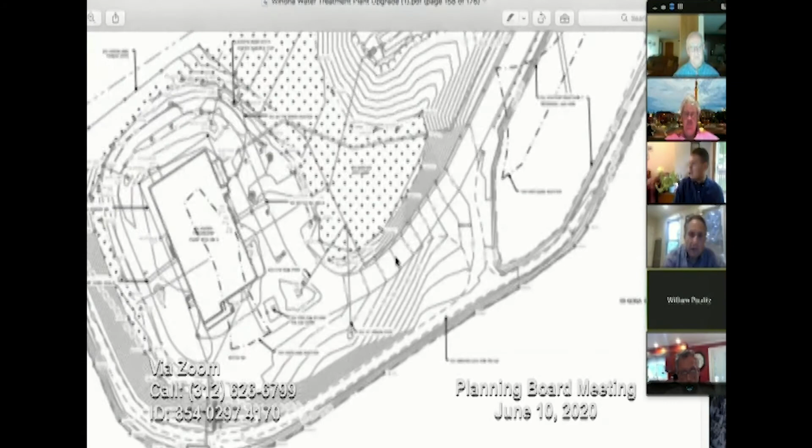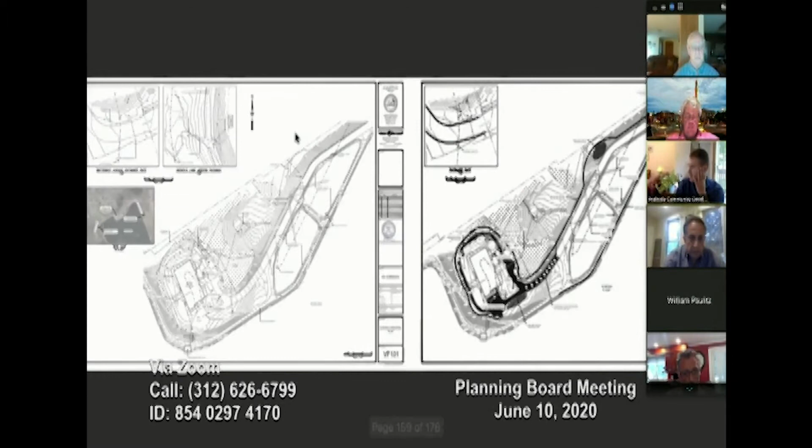Drew, if you want to go to sheet, I think it's going to be 168. If not, it's 159. Yeah, I'm gonna scroll all the way down. We'll see what happens here. So we need to expand out the back end of it by approximately 1,000 square feet. Yeah, that gives you a sense of where it lies in the property there. Or if you want to go to the renderings, Drew, one page before the rendering. Sorry, do you know what page that is? It's going to be the very end of the project. Right. I would say stop.

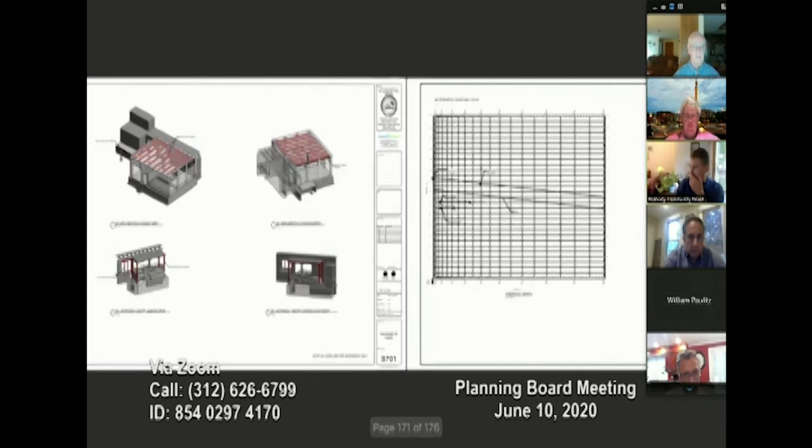I would just go up probably about 6 pages, maybe. Oh, there you go. That was perfect, sorry. You want to go back there? You can keep them both open. One more, there you go.

The reason for the 1,000-square-foot expansion is due to compliance issues with chemical storage. Certain chemicals can't be stored in the same area as other chemicals, and they need a certain amount of area to be stored in. So that's the purpose of that.

But the real purpose of the whole project is to basically rebuild this plant while keeping it pretty much operational, other than a few shutdowns, and try to rebuild it in order to provide better drinking water for the residents serviced by this district, and actually probably looking to increase the service size of the district.

So the property is about 150 acres. We're in an R1 district. We meet all the setbacks. Front setback is 25, we're over 1,500 feet. Side setback is 30, we're at 170. Rear is 35, and we're over 1,200. Max height is 30, and I believe our addition is around 17. For lot coverage, we're way below -- I think 98% of the property will be pretty much equivalent to open space at the end of the day.

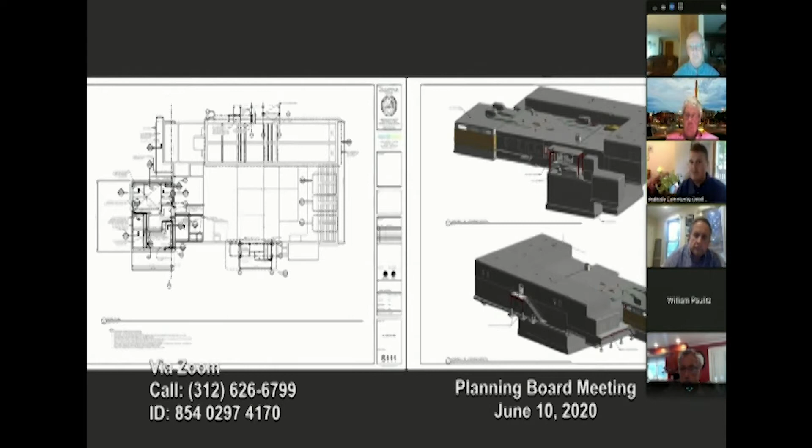So I know I just threw a lot at you, but I don't know if you have any questions in respect to what we're looking to do this evening. This time we'll entertain questions from the board. I'm going to stop sharing my screen now, if that's okay with everyone.

Do we have any questions from the board? Dr. Otto: Could we take a quick peek at the site plan itself?

In particular, Will, I'm interested in modifications to the paved surface, if any. Sure, so Drew, I have the page here. Sorry, now that I've gone, let me just share my screen again, Will, and you can tell me which one works best for you. I think those would be -- actually, I think you probably hit it right there, Drew. Oh, if you want to go back.

So there is a small expansion of the parking in order to push the parking back a little bit because of the expansion of the building. So there is some additional parking -- actually, there's no additional parking being proposed. One of the spots is becoming ADA accessible, and part of it's being expanded out.

So Weston and Sampson did the plans and the stormwater, and they did take into account the expansion of the parking and the entrances coming in. But primarily, the majority of the paved areas really aren't changing too much.

The very long entranceway shouldn't be modified, and the loop around the building isn't being expanded, but we are expanding the parking depth to the south. As you see on the plan, there's about 7 spots, and that's being pulled out a little bit.

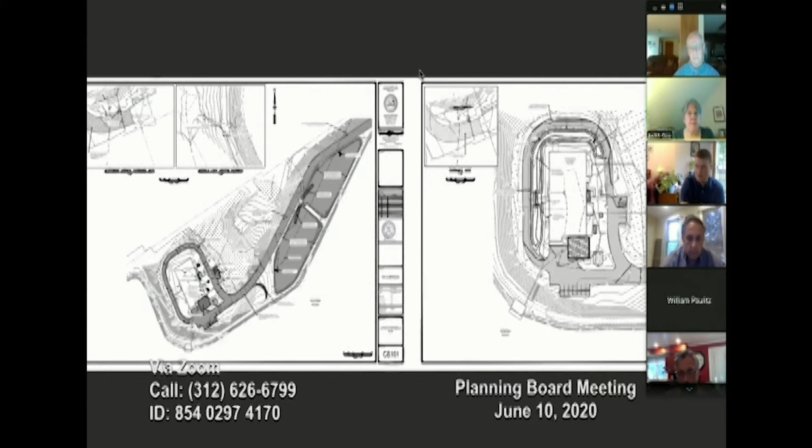Great, thank you. You're welcome. Any other questions from the board?

Roy: I don't have a question, I just have a comment. I think it's a big waste of time for the city to be having to do all these presentations. I think these things should be exempted, but that's just me. No further comment.

Drew: Is this a recommendation to the city council for approval, or is this building? So this is a site plan review. Anything over 1,000 square feet addition requires a site plan review, that's why it's in front of the board. So this would be a recommendation to the building inspector for a building permit. That being said, they still need to go in front of city council, correct, Will? That is correct.

At this time, I will accept a motion. Dr. Otto: Mr. Chairman, I would move that the board recommend to the building inspector to issue a building permit for the Winona Pond Water Treatment Plant, subject to all other permits being in place.

We have a second. Second -- Dennis Phelps, second. Okay, roll call. Sorry, let me just get the sheet back up. You want to do the roll call? Yep, sorry, I'm just--